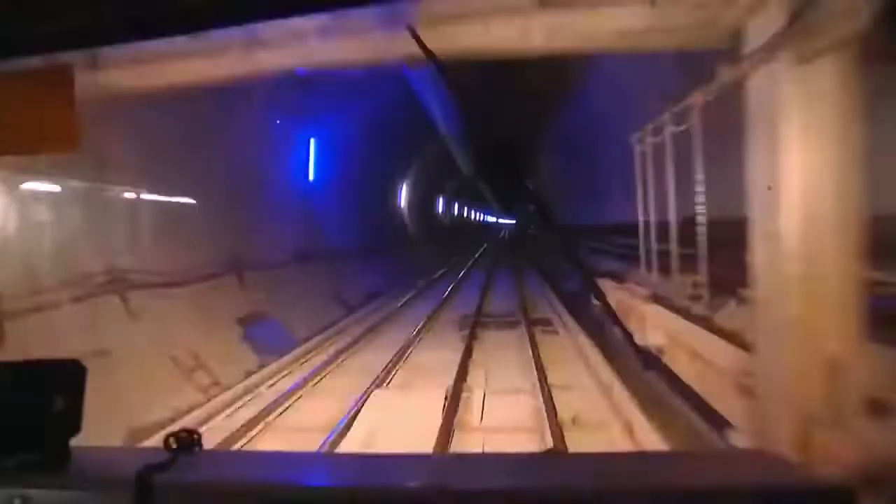Two teams are working through one of the most dangerous geological zones on the planet. If you encounter some bad geology halfway through, it's not like you can go around it. No, you have to go right through it. On the one hand, tunneling with one of the biggest machines ever built. A 30-foot tall drill bit that is mining right through the earth. And on the other, blasting through 7,000 tons of rock each day.

All right, so the charge is in. We're gonna blow the crap out of this wall. After 12 years and 34 miles of digging, they're just 4 months away from the final breakthrough, revolutionizing transit through the Alps forever.

I'm in Switzerland, famous for its handcrafted timepieces, milk chocolate, and political neutrality. But more importantly, Switzerland is the geographic epicenter of Western Europe. 2/3 of all freight sent between Northern Europe and Italy is transported through this tiny country, just half the size of the state of Maine.

But despite its convenient location, Switzerland is a geological anomaly. Over 65% of the entire country is covered by the second largest mountain range in the world, the Alps. With soaring peaks over 15,000 feet high, the Alps form a 700-mile-long barrier between northern and southern Europe. And at present, the only way to get from one side of the country to the other is up and over the mountains.

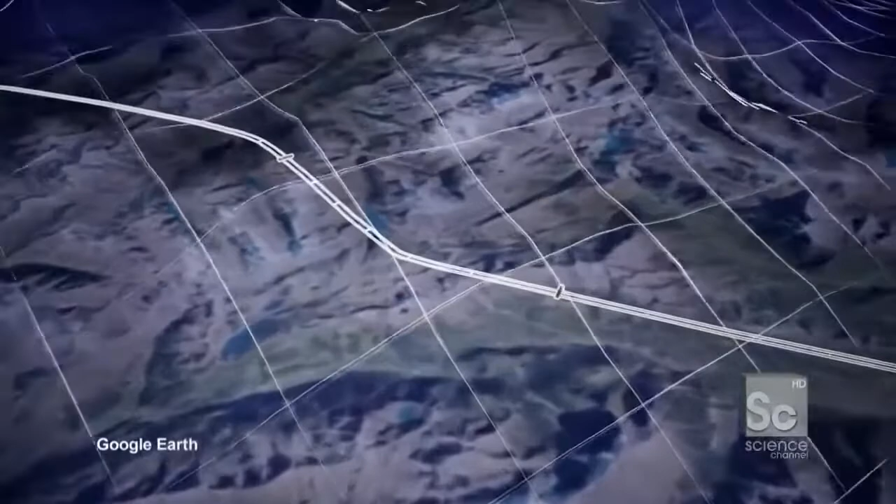Switzerland has launched the most ambitious tunneling project ever attempted, 6,000 feet under the Alps. The Gotthard Base Tunnel will be the longest in the world, stretching 36 miles from one side of the Alps to the other, more than 4 miles longer than the channel connecting England to France. When complete, the tunnel will consist of 2 parallel tubes, each 30 feet in diameter. Soon, high-speed trains will cut straight under the base of the Alps for the first time ever, doubling the current freight capacity and dramatically changing transportation through Europe.

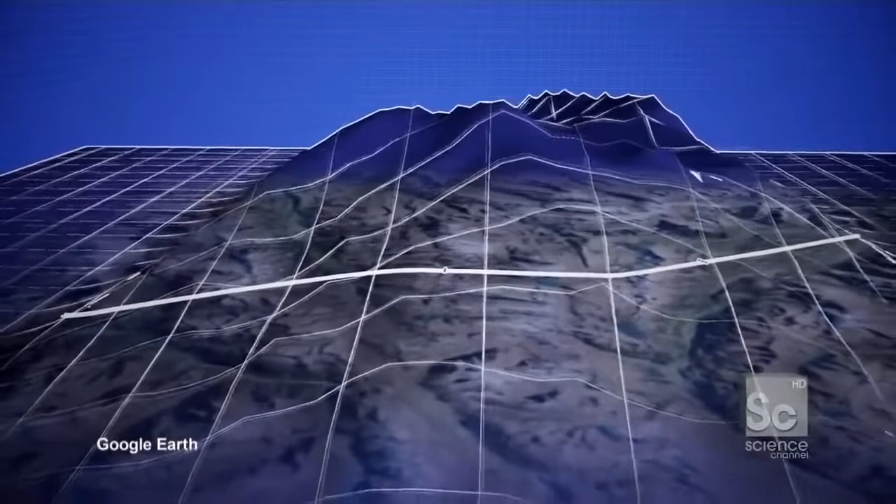I mean, it's more than just making freight move more quickly. Exactly. Alps and mountains are part of the Swiss identity, but it's something that blocks us from the south. And for centuries, people have looked to have a fast way through the Alps. And it's not only about transportation, it's also a cultural exchange. It brings regions together. To build this revolutionary route, 2,000 workers have excavated 24 million tons of material, enough to build the Great Pyramid in Egypt 5 times over.

After 12 years and 34 miles of digging, the tunneling teams have just 2 miles left to go. They'll meet up under the deepest part of the Alps, 6,000 feet below the surface. And today we're headed 17 miles from the southern entrance, where one team has encountered some of the hardest rock on Earth. Now we're about to begin a 45-minute journey in that train, deep into the tunnel, to the very active edge of where the tunnel's happening.

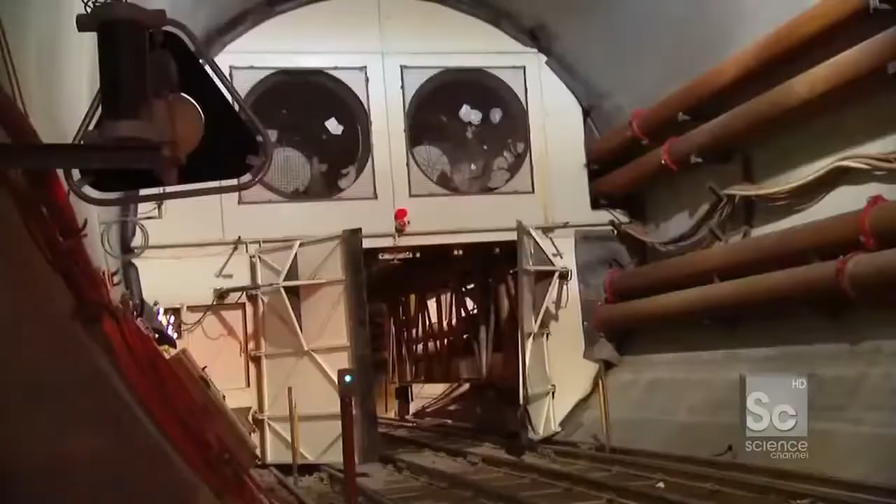Just kind of freaky, really. Okay. And we're off.

Tell me about where we are in the tunnel relative to where we are in the mountains. We're now basically under the main ridge of the Alps. The pressure from the mountain overhead creates one of the toughest rocks in the world, granite. 6 times harder than concrete, it's what's slowing down the tunneling team. So the length of the tunnel, the height of the Alpine mountains, the rate at which you have to build that, all of that has come together to create a situation that's unprecedented for tunneling.

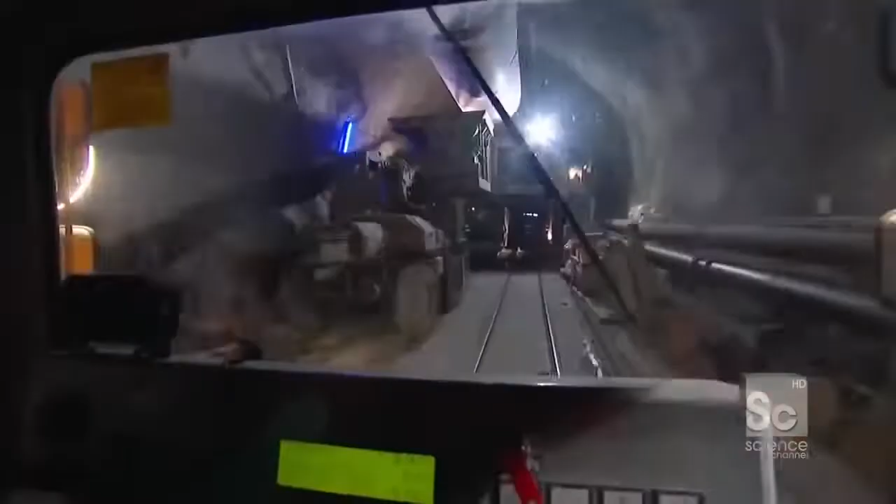Yes, the challenges that we had here on this project will actually probably never happen again. No one's been at these depths in the Alps before. No, I mean, we never know where we're going. We're like astronauts. We're putting our foot every day on a rock where no one has ever been before. Well, after about a 45-minute train ride, it's time to go to work. All right, we're here.

So although it's a little bit hard to tell, although it looks like I'm on some big metal rig, this is the TBM. This is the tunnel boring machine. This thing is 1,200 feet long from the back to the front. And essentially, this is what it's all about. A 30-foot tall drill bit that is mining right through the earth. One of the biggest machines on the planet.

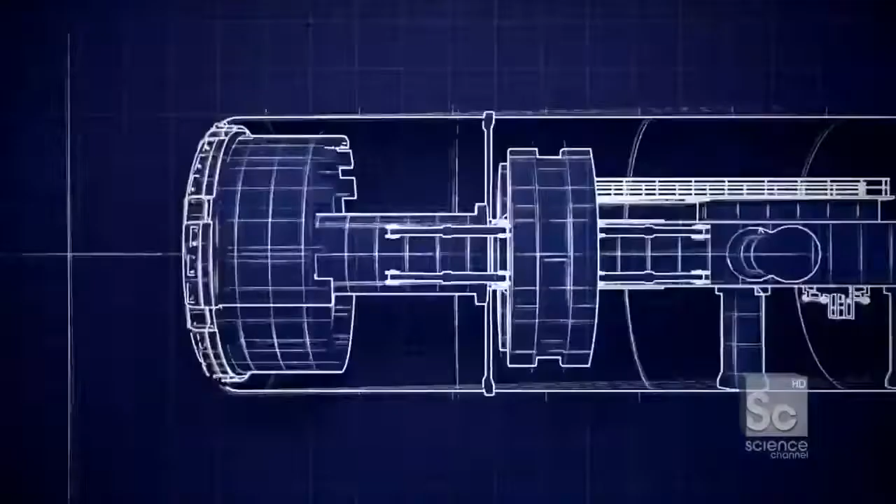The TBM is a 3,000-ton drill as long as 4 football fields. It bores through the mountain with a 30-foot tall rotating cutter head that pushes against the tunnel face, crushing the rock, advancing the tunnel an average of 90 feet a day.

All right, so now I'm actually inside the chamber, directly behind the cutter head, and if you look right over here, those are the cutters. Those are the actual rotating devices that are making contact, physical contact, with the front of the tunnel.

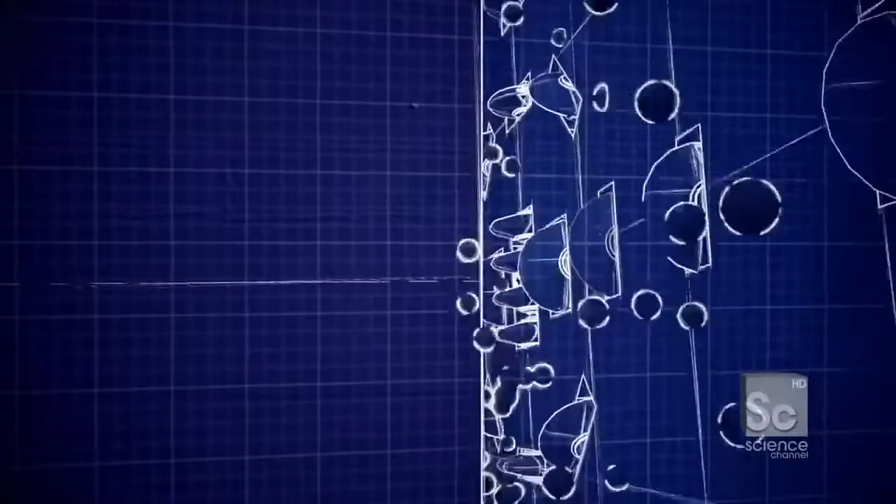The 66 disc cutters located at the front of this TBM shear off more than 7,000 tons of rock each day. They've been boring through the granite for 18 hours straight, and they've become worn down. Now, if the sharp edges are worn more than an inch without being changed, it can slow the TBM from a maximum of 120 feet a day to just 9. The crew has to repair this battered cutter head before they can continue drilling.

The question is, have they been worn out? Do they need to be replaced? And the man who can figure that out is Martin. Martin, give me some screen. Martin is from Germany, does not speak a lot of English, but we're gonna make this happen because we're both now 6,000 feet under the Alps. There's not really a lot of time to try and have a cultural exchange. So, this is our machine here.

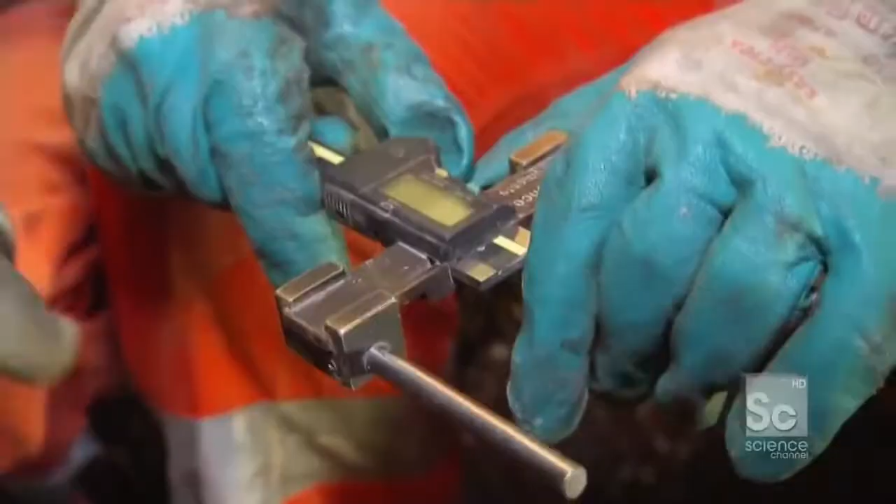Martin uses a specially designed caliper to measure how much of the cutter has been eaten away. If the reading is more than 25 millimeters, then the cutter's been worn down too much and has to be replaced. Myself and Martin are gonna climb into the cutter head, right, 30 feet tall, measure all 66 cutters, and find out what has to go, what can stay to get this machine back to mining.

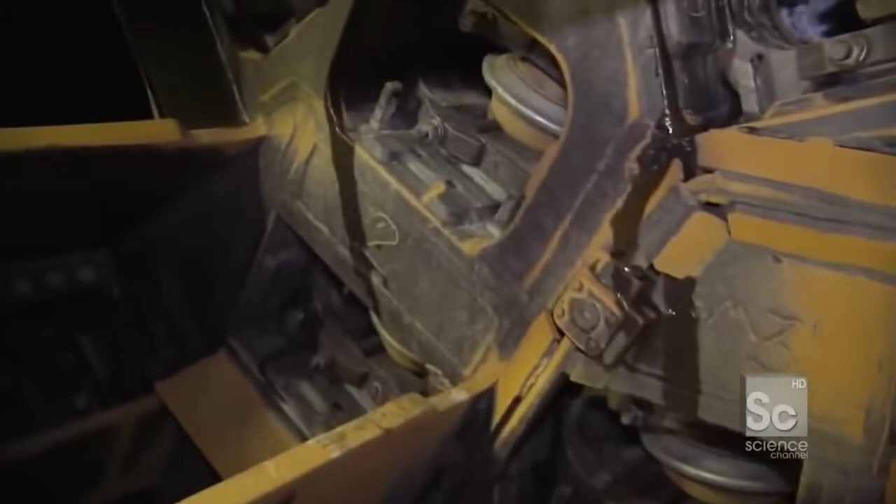Not much below me. Good. All right. The cutter head is as tall as a 3-story building, pushing through the granite with 26 tons of force. Look at him down there. The cutters wear down after less than 12 hours of drilling, 10 times faster than in softer rock.

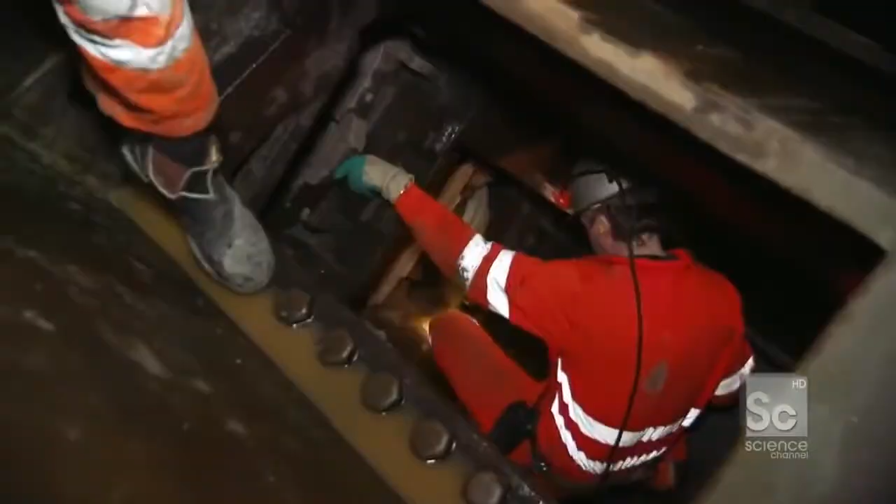We're now in the bottom of the cutter head. I'm actually at the very underside of this 30-foot disc. And what we're here to check out is right there. There's the cutter right there, Martin. So let's measure this cutter head. All right, so now look, as the caliper extends, this is the whole point here.

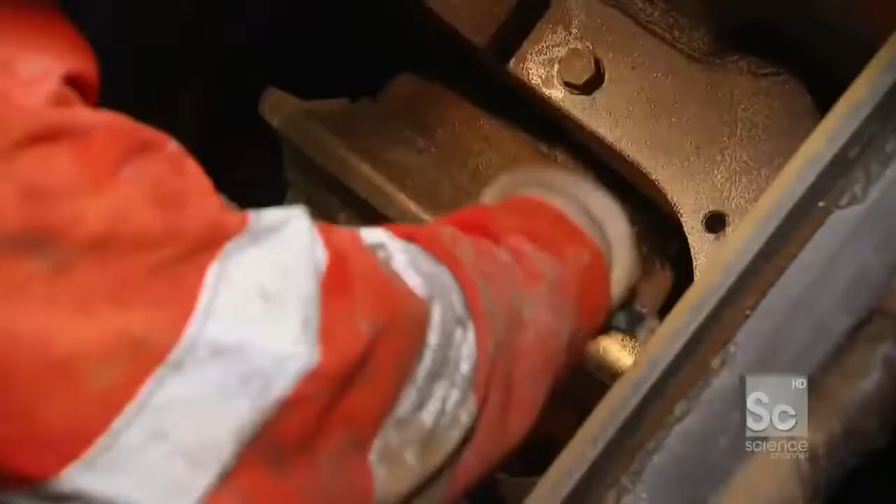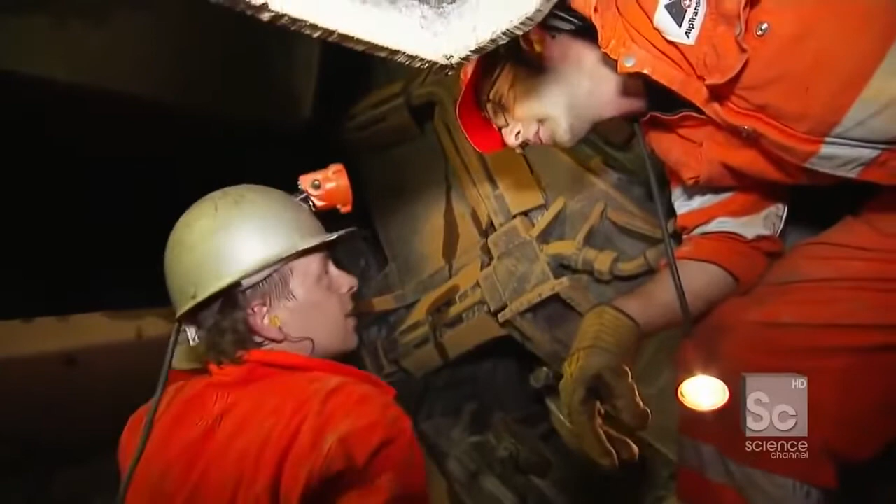Very good. I guess really when you're dealing with 66 different cutter heads, it's hard to get excited after each and every one. After measuring, we found that 3 of the cutters need to be replaced before the TBM can get back to work.

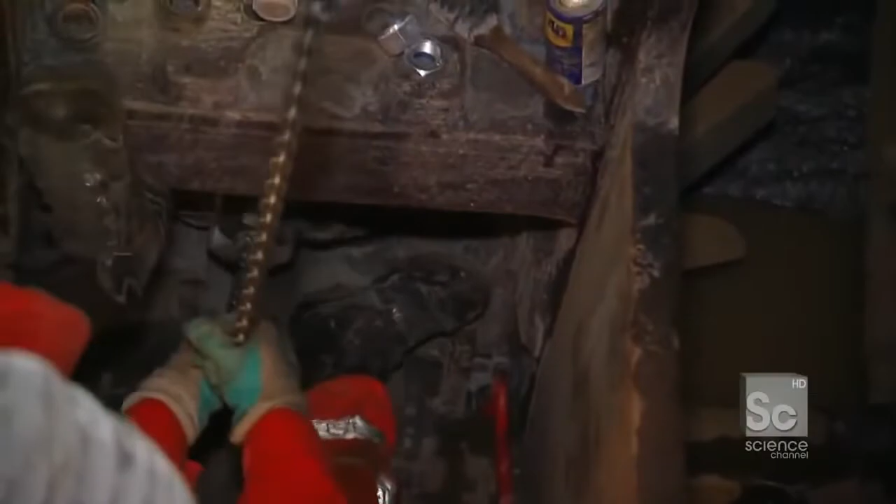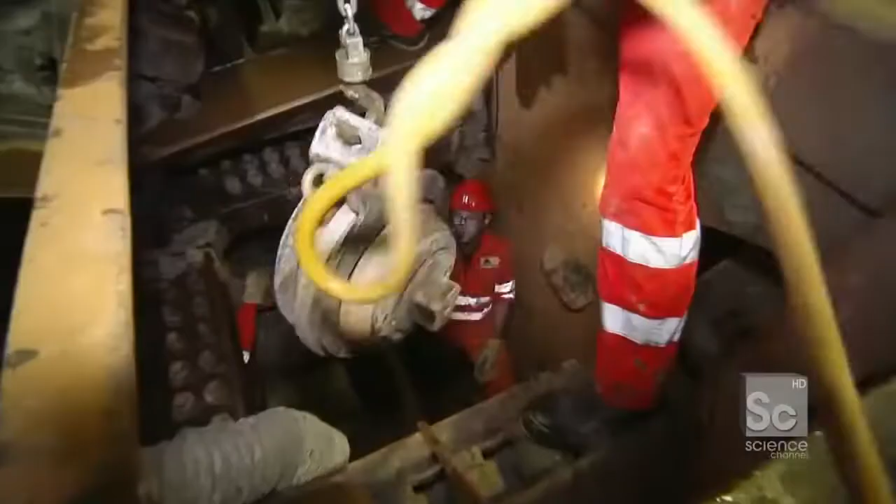So essentially what Martin's doing right now is taking out the old cutter head. Auf. Here it is. He's got it. There goes the old cutter. Over the course of the project, Martin has replaced more than 10,000 cutters. Each one is made of 300 pounds of solid steel, so the crew uses a hydraulic crane to maneuver them into position.

All right, and so this right here is the cutter. You'll notice the steel is at its full length, so this is the new stuff. Gotta get the old stuff. It's basically like changing a tire, a very heavy tire. You know what I mean?

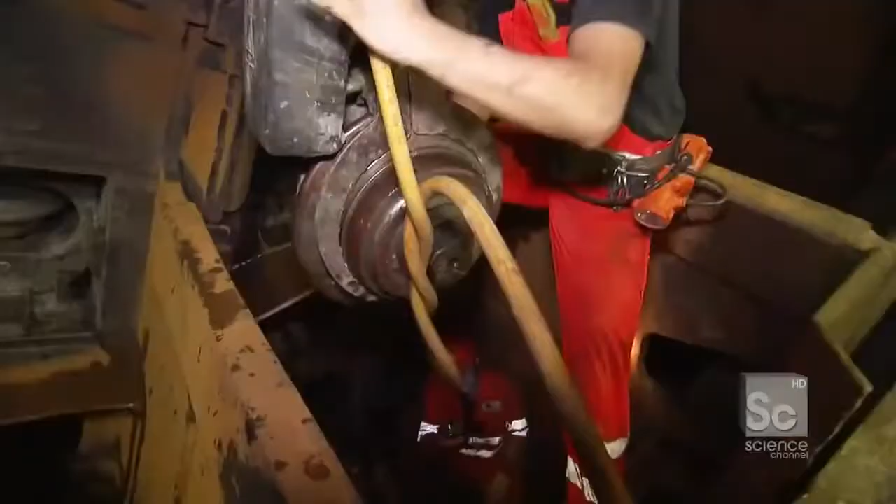So we've swapped the old one out. Next step is bringing the new one. And now it's about getting it to fit in the hole, which seems to involve Martin's feet. There it is. Nice. So he's generally gotten into place. He's now using a pry bar to wedge it over.

The cutter is specifically designed with just 2 bolts. Oh. For fast installation, even in awkward locations.

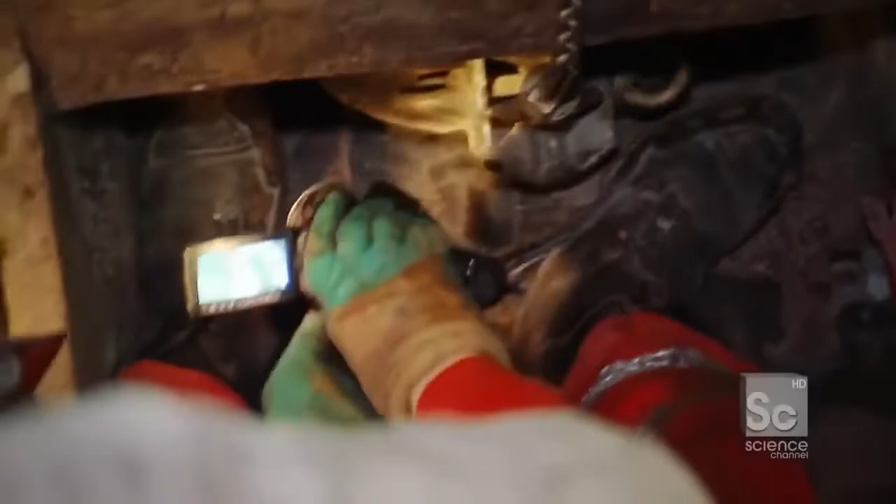Now Martin's shooting. Martin is now fully actually making the show by himself. Nice. Martin's now photographing his own work. Pretty good stuff. Martin, as far as I'm concerned, you shoot it, and then I'll do all the work.

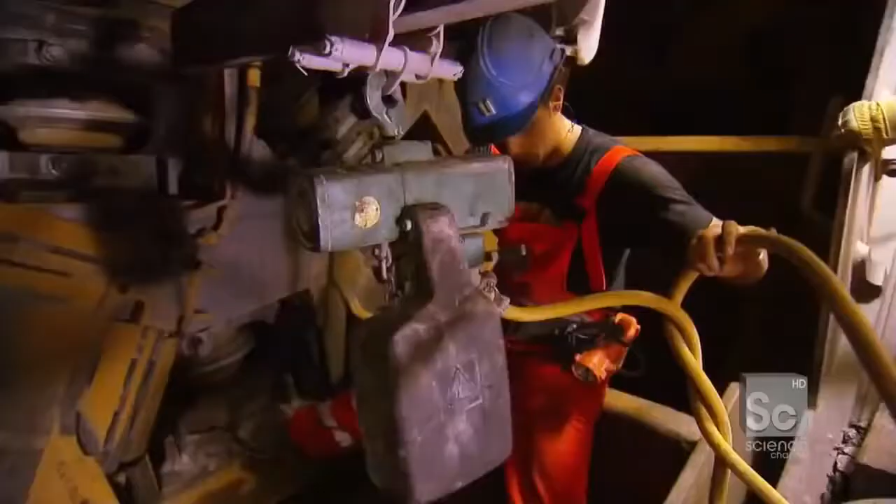It's incredible that there's 66 of these things, and you can imagine they're getting worn down constantly. And this is what it takes to just change out one cutter in one unfortunately inconvenient location. All right, so the old one was taken out. Yeah? New one is in.

Finished? Let's finish. You did good. You did good. You're a fast man.

Come on. And now, thanks to his nimble hands and sort of perspicacity, this cutter head is ready to get back to work and start building this tunnel again.

Coming up, using 1,000 pounds of explosives. This is like full-on, should I cut the red wire or the white wire situation? To blast through one of the toughest mountains on Earth.

The Swiss are known for being incredibly precise. Whether it's their handcrafted timepieces or their famous train system, which, by the way, I can personally tell you, departs and arrives exactly when they say it will. And they're going to need that level of accuracy because the tunnel they're building is not just the longest in the world, but it also has to accommodate some of the fastest trains ever built.

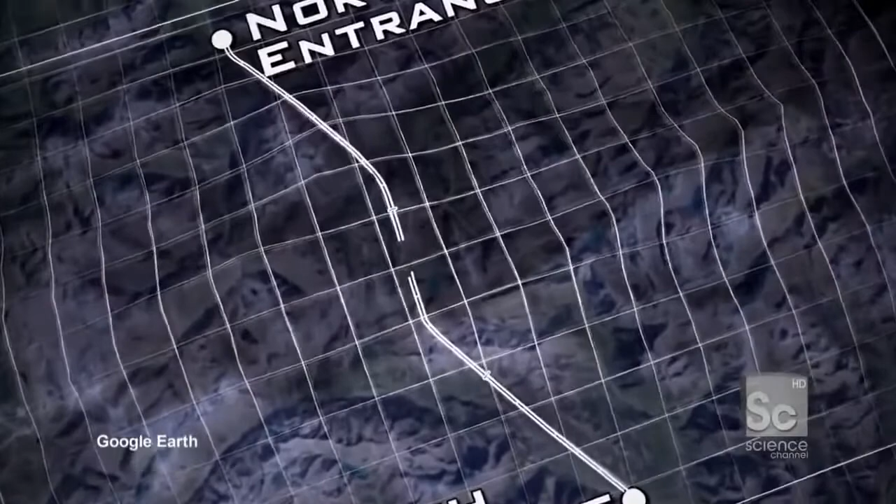Trains will pass through the Gotthard Tunnel at over 150 miles an hour. And at these speeds, even slight curves could cause a derailment. For tunneling teams on either side, this means digging a direct route through 36 miles of rock and meeting at an exact point 6,000 feet under the Alps.

I mean, how accurate do you need to be? We have a tolerance of 12 centimeters, which is this much, that we can use to meet. It's like a bow and an arrow, and you don't see the target, but you still have to be right in the target, right in the middle point. It's incredibly close, and you're shooting an arrow essentially blindly over a trajectory of miles. That's about 1.5 miles still left, yes.

And what I find to be so amazing is that you have a set beginning point, you have a set end point. If you encounter some bad geology halfway through, it's not like you can go around it. No, you have to go right through, and that's the main goal of this tunnel. You cannot change the geology.

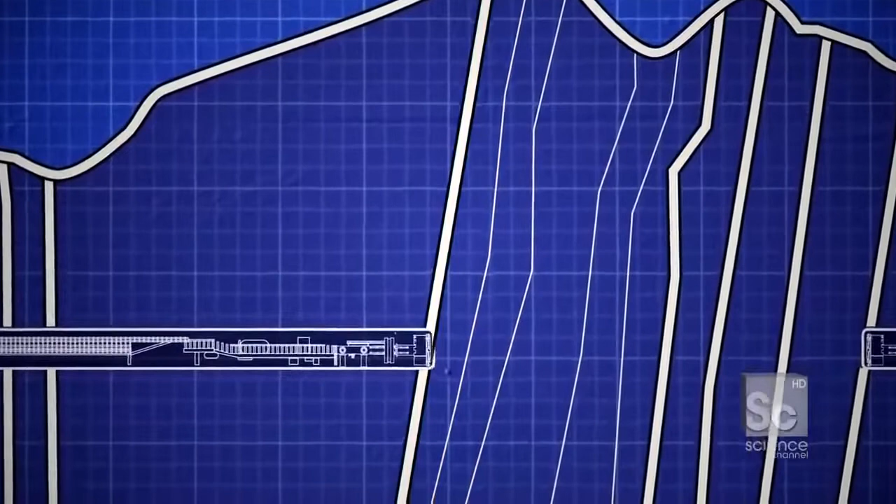Ideally, 2 tunnel boring machines would work towards each other, meeting in the middle. But on the north end of the tunnel, the drilling team has hit a patch of soft rock with fault lines. If they bore straight through, it could crush the TBM. So they had to resort to an older method of tunneling.

So of the 36-mile-long tunnel, 90% of it is drilled by using a TBM, a tunnel boring machine, that can bore through as much as 75 feet each and every day. But for the area where I'm standing in right now, this 1/10 section, there are so many fault lines, it's too dangerous to use a TBM. So instead, they're kicking it old school and drilling and blasting.

Blasting away the rock is 10 times slower than using the TBM, but it's the only solution that'll work in this volatile area. The mountain's enormous pressure creates a squeezing effect, shrinking the tunnel's diameter by almost 3 feet, making it too small for future trains. Now to prevent this, they're blasting a 3-foot wider diameter tunnel, allowing the rock to naturally squeeze down to the right size, matching the other side.

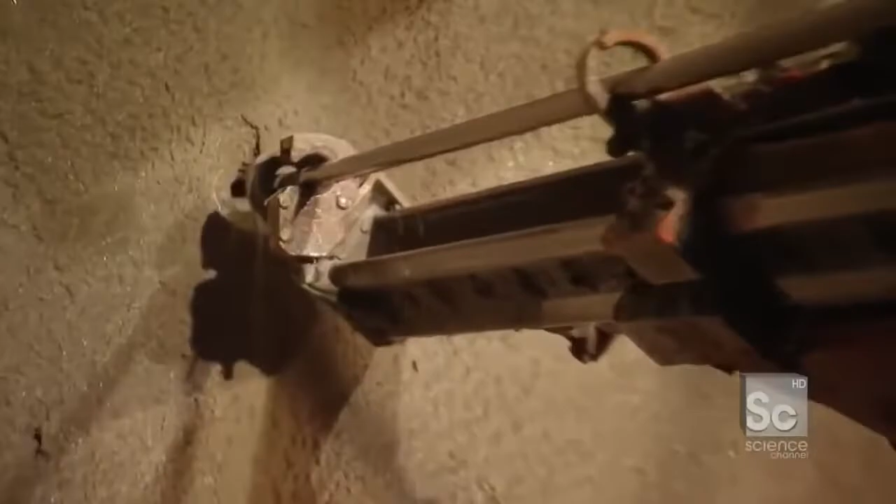So this thing is called a 3-boom Tamrock. Essentially, 3 different drill bits that can put as many as 120 holes into that wall. These holes are filled with ammonium nitrate, a liquid explosive that blasts away the rock, advancing the tunnel 9 feet at a time. Coming up.

Okay, so now I'm inside the cab of the 3-boom Tamrock, and it's this thing and this man right here that are actually driving this thing and supporting this rock face.

How are you doing? You're smoking. That's good. Because we're in a confined space in a tunnel with very little air. So you do? You're both smoking.

Good. It's fun. What this man is doing when he's not smoking is actually drilling into the side of the tunnel. Hang on 1 second, you just want to take a quick smoking break. Get that out. Lights lit up and squared away. Once we have that done, we can focus back on the drilling to make sure that it doesn't collapse. Assuming everyone has a cigarette.

So actually, if you look here at the computer screen, it sort of sums up what we're up to. This is a cross-section of the tunnel right in front of us, and the goal is to locate 120 holes on this face and drill those holes, filling each one with explosives so we can push that wall out and grow the tunnel.

Are you smoking back there? This guy loves to smoke.

To precisely control the diameter of the tunnel, a surveyor pinpoints the location of each hole within an inch, evenly distributing them across the rock face. All right, so at this point, we're almost done. Almost all of the 120 holes have been drilled, and the next step is to load them, or in other words, fill them with liquid explosives.

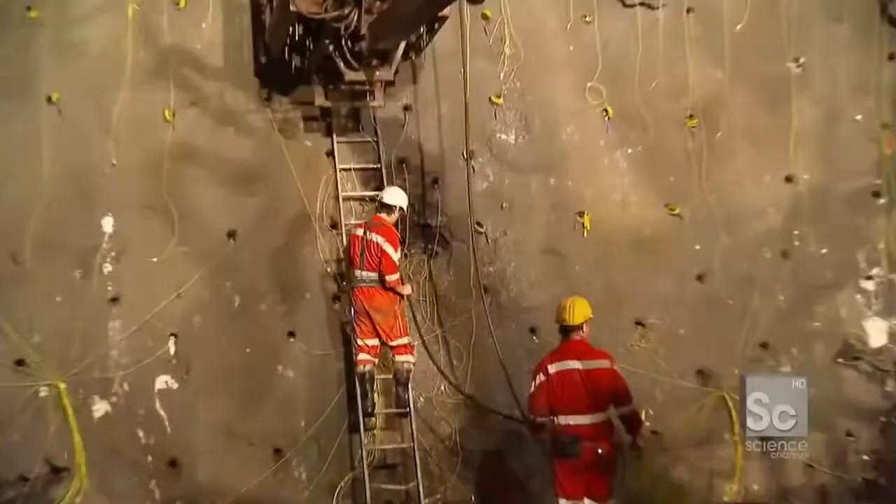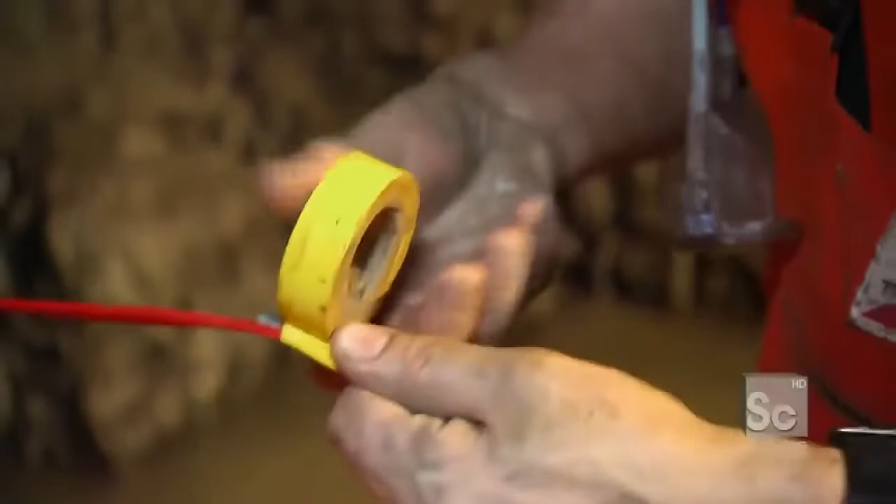The charges are tied together and timed within milliseconds for maximum control, starting at the center and radiating out. The last charges to explode are at the bottom of the face, loosening up the pile of debris, making it easier to remove. The last thing to do is to take, if you look right here, the fuse that's connected to every single one of the holes, connect that to this right here, all the explosives getting tied together with this last piece of, well, yellow electrical tape. You would have thought it a little bit more sophisticated at this point, but that's it.

With the fuse connected, the explosives are live. The team retreats 900 feet up the tunnel to clear the blast radius. When the multi-million-dollar equipment starts to get backed out of the way, you know it's time to go, so we're there. All the holes are filled, charges are connected, we are done, everyone's evacuating. We're ready to blow this thing up.

All right, so we're gonna hide behind this steel container right here. Now, there should be enough protection, but I wanna make this clear. The blast is happening right over there in a straight line. Okay, that's it down there, that's the end of the wall. So we're not down a corner, we're not hiding far away.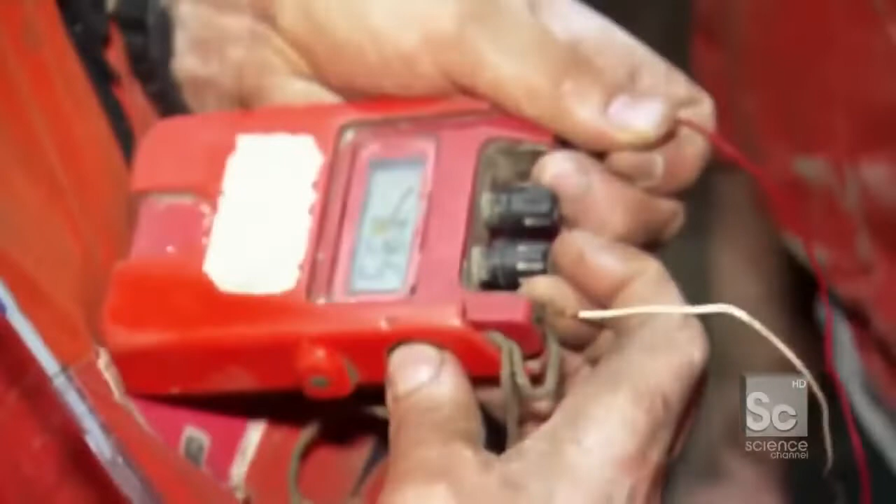There are just over 100 blasts to go before the tunnel is done. And the honor of setting them off goes to the construction company's largest shareholders. And as we speak, in his hand are the 2 wires that came all the way from that wall, physically dragged all the way there, right? He's got the wires there. He's tying them into the detonator, one to the next. This is like full on, should I cut the red wire or the white wire situation. There's about 14 different people from the company to my left here.

Wow. Grande. Well, there they go. Apparently what's required to set off the blast here is that you have to have a substantial amount of stock in the company. I have none, so I didn't get to blow it up. He did a fantastic job. The blast went off, all is well. Potentially the rock wall has been pushed back 9 feet, and I'm gonna start buying stock in this company, so in a couple of years, if I stay focused, I too can blow something up.

The blast puts off superheated ammonia gas. So we have to wait 30 minutes for it to clear before we can check the damage. There's still a lot of residue in the air, so your eyes do burn. Even with the gas mask, it's really hard to breathe. You can feel the ammonia in the air. Well, what do you think? Tip top, tip top. Good? The man is happy.

It'll take the remainder of the day to shuttle all 6,000 tons of debris 5 miles out of the tunnel. Well, look at this. Where I'm standing right here, 15 minutes ago, was a solid wall of tunnel. And now, I'm standing on the residue. The tunnel has been pushed back by 9 additional feet. And they're gonna spend the rest of the day pulling out the muck and getting ready for the next blast.

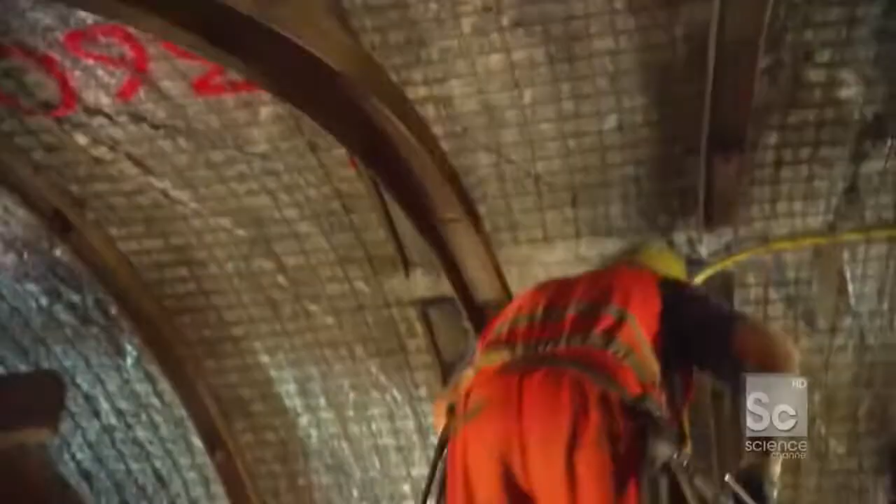Coming up, preventing a catastrophic cave-in with a one-of-a-kind technology. Yeah, it can collapse and fall down, and that's a great problem. That's a big problem. Yeah.

So I'm now driving through the Swiss Alps, one of the largest mountain ranges in the world. And it's complicated. I'm climbing over 5,000 vertical feet. And to do that, you have to negotiate these incredible curves, one hairpin turn after the next. For more than 800 years, people have been searching for a faster route through the Alps. But it just wasn't possible until now. Because to build a tunnel straight through these mountains, engineers had to overcome some of the most complex geological conditions in the world.

Generally speaking, land masses are formed by a series of earthen deposits, one on top of the next, for millions of years. This creates a horizontal stratification of layers. Now, as you can imagine, this is great for tunneling. The TBM goes in on one side and has the same consistent rock type all the way through the tunnel.

However, here in Switzerland, things happened a bit differently. When the tectonic plates made contact, they actually folded upwards, creating a series of vertical stratifications, which make an amazing mountain range, but also make a lot of different geological types. So when the TBM goes into the mountain, it hits one type, and then a second type, and a third, and a fourth, and a fifth. Multiple different problems requiring multiple different solutions.

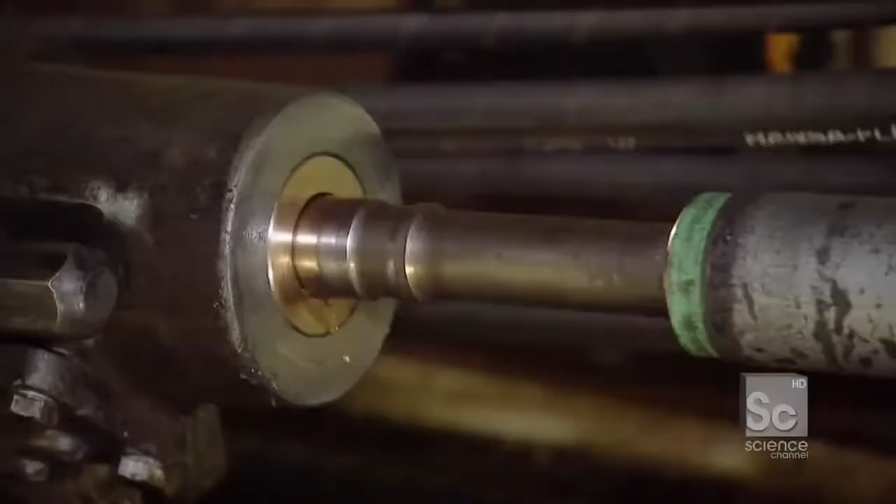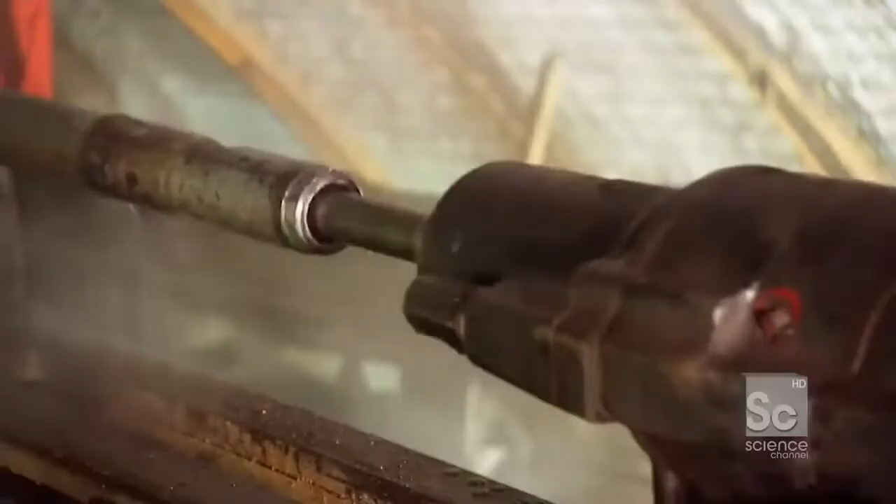The drill literally feels its way through the rock 360 feet in front of the TBM to find out if it's hard or soft. If the rock is too soft, there's a high chance it can cave in while drilling, burying the $30 million TBM and the men working on it thousands of feet below the Alps. So for example, if the drill steel goes right into the rock very quickly, you know it's soft. Exactly. But if the drill steel has to fight its way through, you know it's very hard. Yes.

Yes, we stay also here with our eyes of geologists, not only with digital data, to look at the rocks, how they behave. You have to actually see, feel, understand the rock. Yes. Because in reality, you're still working blind. I mean, you never actually see the rock, you only see the way in which things interact with the rock. Exactly. It's easier today to look at the surface of the moon than to know exactly what we have 10 meters inside this rock mass.

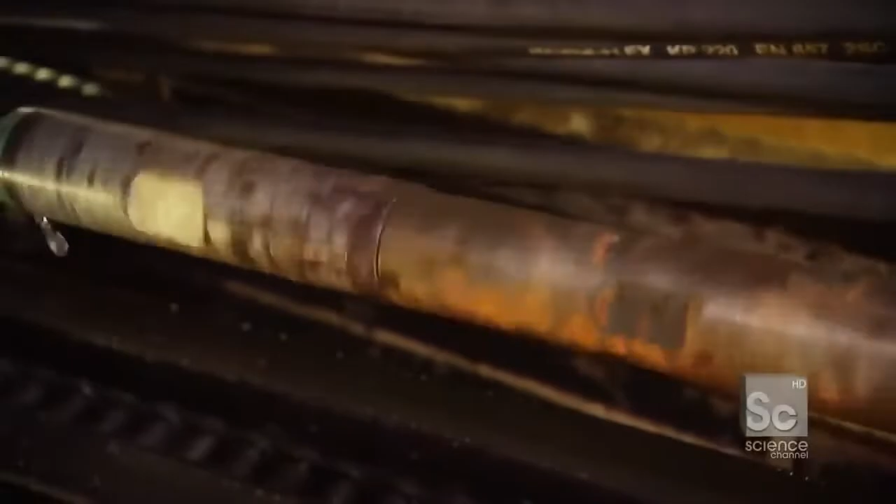To probe 360 feet into solid rock, the drill is made up of 36 10-foot-long sections joined end to end. So as you can see, what we're going to do is latch that on, tighten it up, lock it in. So in doing so, we've added a new piece of steel, creating one long 360-foot probing stick that tells us what's happening out in front of the TBM. So the man who's actually controlling the drill and the force he applies to each subsequent piece of steel is right here. Ralph.

Guten Tag. Good day. I'm Danny. Oh, yeah. Nice to meet you. My English is bad, sorry. My German is terrible. Okay. I started and you... Perfect.

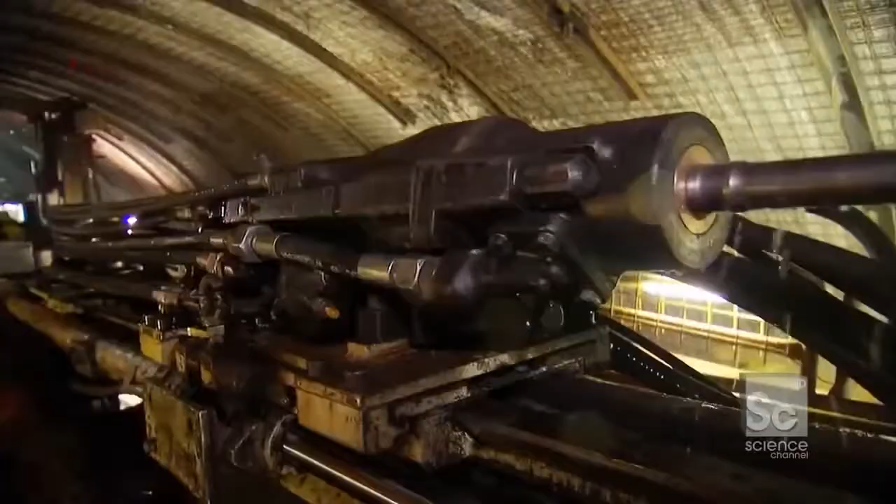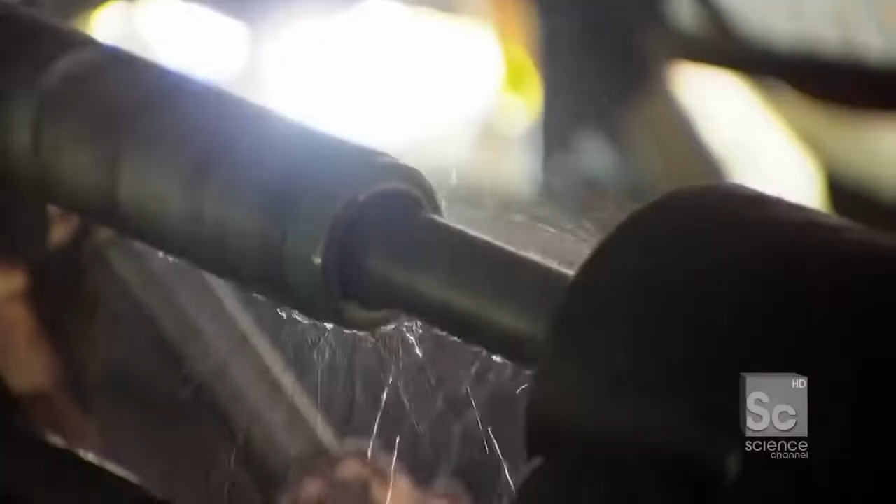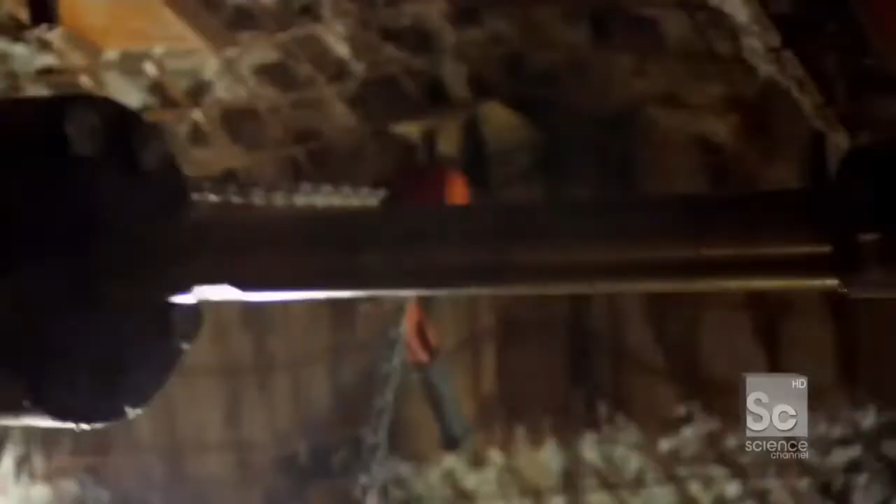About 100 feet in, the drill hit good, hard granite, but it also revealed that the first 100 feet were much softer than expected. If it's too dangerous to drill through, they'll have to stop the TBM and manually blast through the danger zone, adding 5 months and $10 million to the schedule.

So tell me about what was discovered during the exploratory drilling. Yeah, through the drilling, we find out some very, very soft material. So now we're very nervous of the situation. If this were soft rock, what could happen? Yeah, it can collapse and fall down, and that's a great problem. That's a big problem. Yeah.

To find out if the TBM can safely move through this soft rock, geologists are doing a rare secondary exploration using an endoscopic camera to peer into the mountain. And you don't do this very often. No, but in the moment we have a very special situation, so we use this camera thing. It's just the second time or third time ever. And so what do you hope to see by putting the camera in there? We hope to see just a small band of the soft thing, so that would be good, but we don't know.

Same thing, yeah. The camera shows the physical structure of the rock, information the drilling can't provide. So this is it right here. Wow, that's amazing. So essentially, they have an endoscopic camera attached to the end of this blue thing, and they're going to stick this camera in a pre-drilled hole about 150 feet out that will tell them exactly, by eye, what is happening in the rock.

And I've always wanted to do this. That's not the tunnel, that's my mouth.

Geologists look at the pattern and colors of the rock for clues about its structural integrity. If you look at that screen right now, what you're able to see is exactly what geological condition we're gonna experience 150 feet in front of where we are right now. This is like that scene in Star Wars when the monster came out. That's amazing.

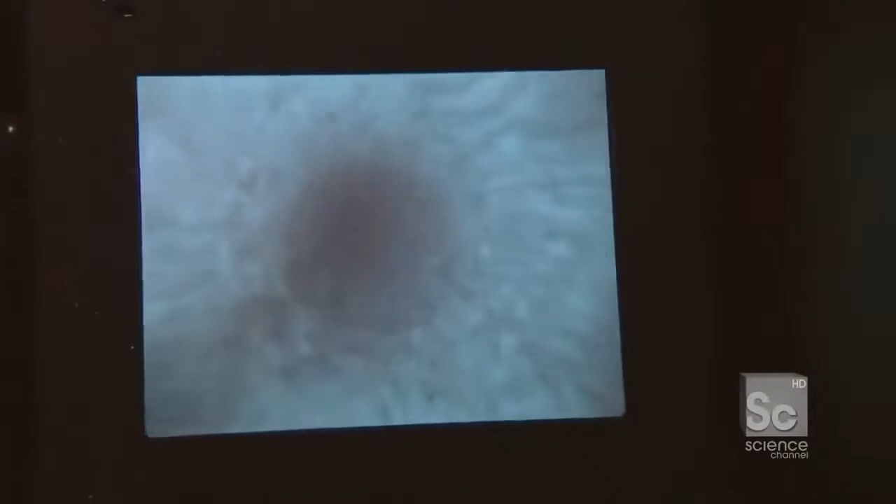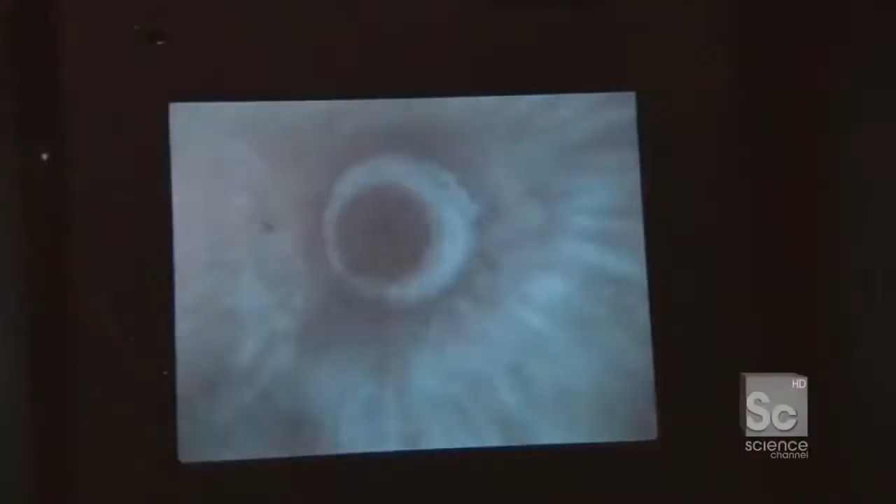So as a geologist, what are you taking away from that image? Yeah, what I see is a stone from inside, and you can see the structure, and you can see that it is the same structure as the stone we have in the back of us. So when you look up, that same kind of black and gray, the same lines you're starting to see just around that edge. Like right there, that white fissure right there. That is nice news. That's good news.

That's good news, yeah. The footage shows that despite its softness, the rock is structurally sound, and the TBM can safely bore through it to get to the hard rock. So if this rock is good, that means that rock out there is also good. Yeah, absolutely. So as a geologist, does that make you smile? Yeah. That's a good rock. That's good rock.

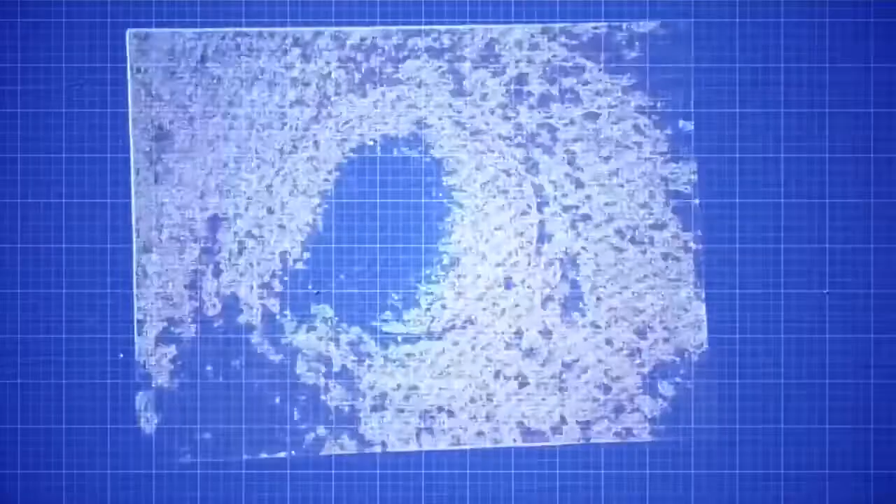Coming up, preventing a major train derailment with a drainage system designed to stop thousands of gallons of water. This can't be the easiest way to do this. But first, who holds the record for the longest tunnel in the world? The answer after the break.

The answer to the trivia question: currently the Seikan Tunnel in Japan is the longest in the world at 33.3 miles.

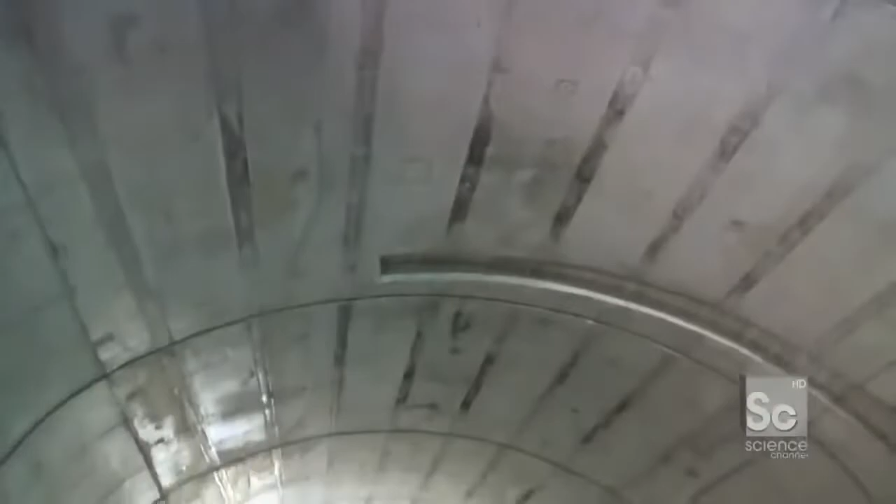The Gotthard Base Tunnel gets its name because it cuts through the base of the Alps more than a mile below the peaks. Now, while this depth creates a fast, flat route, it also puts the tunnel in danger, not only from the enormous pressure from above, but also from the large quantity of water inside the mountain.

The Swiss Alps, if you think about it, are a waterlogged mountain range. There are lakes and streams up top, as well as snow-capped peaks. And when that snow melts, all that water will slowly percolate through the mountain and ultimately come down into the tunnel, rusting the steel and eroding the concrete. Over 1,000 gallons of water seep into the tunnel every second.

If it's not contained, that water could be incredibly dangerous, eating away at the rock supports, potentially collapsing the tunnel, or rusting the high-speed rails, causing a major derailment. So the challenge is to find a way to take this 36-mile-long hole and make it waterproof.

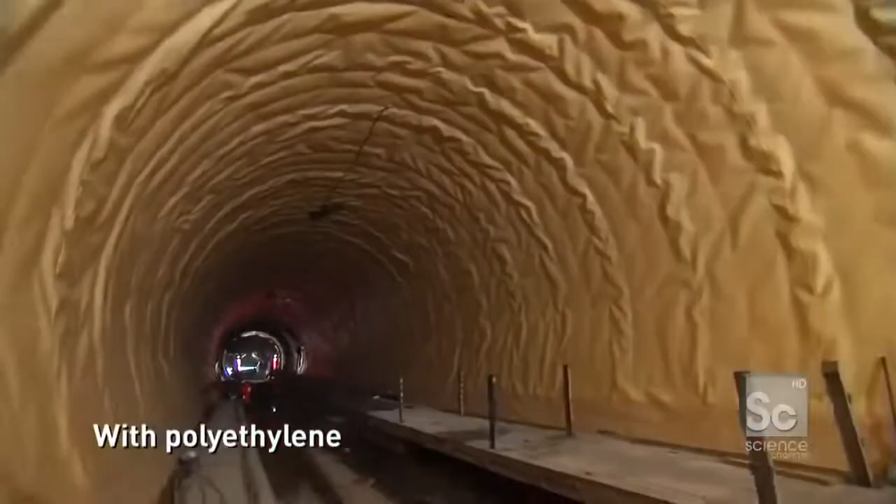Gunther, the challenge is the Alps are full of water. Yes. Lots of water. I know. You know this. I know this. You're from here. You know this. I know this, yes. How do we keep the water from going into the tunnel and rotting out the steel and rusting out the railroad tracks? With polyethylene. This is absolute security. This is what keeps it dry. No chance for water to come out.

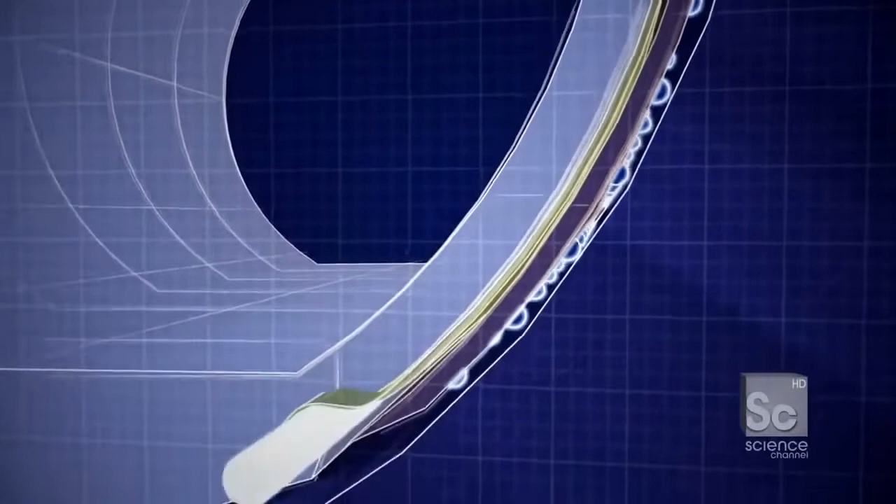No chance. This tunnel has one of the most advanced tunnel drainage systems ever made, hidden behind the tunnel's concrete structural wall. A thin sheet of yellow polyethylene actually creates the watertight seal. Under that, a thicker layer of plastic protects the waterproofing from the tunnel's rough walls. Finally, small spacers create a half-inch gap from the rock face, allowing water to flow down into a drainage pipe. And the key to the entire watertight system, installing it without any punctures or seams.

And so to make sure that it's solid with no seams or holes or edges, we're going to wrap this around the entire circumference. Yes. One piece. This is no problem. All the way around. All the way around. The layers are made from 100-foot-long sheets of seamless plastic. In total, they'll use more than 50,000 sheets to seal the entire tunnel, enough to reach from New York to Boston and back again.

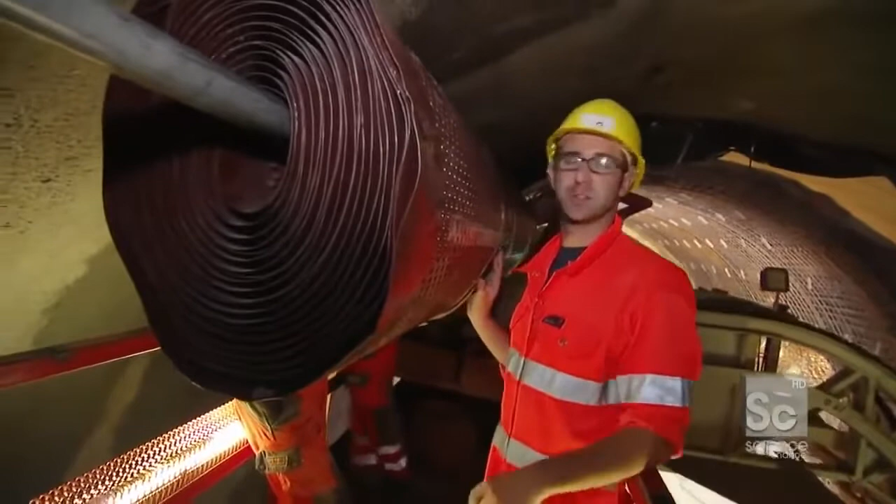Now, one of the oddest things about building a tunnel is that you're working with an upside-down circle, right? And you have to cover every single inch of it. So rather than go up, build some scaffolding, get higher with more scaffolding, they've created this rig that moves 360 degrees around and lets us unfurl these sheets of drainage mat in one single shot. Coming down. Look out. Sorry. The drainage mat is secured to the wall of the tunnel with gray plastic caps.

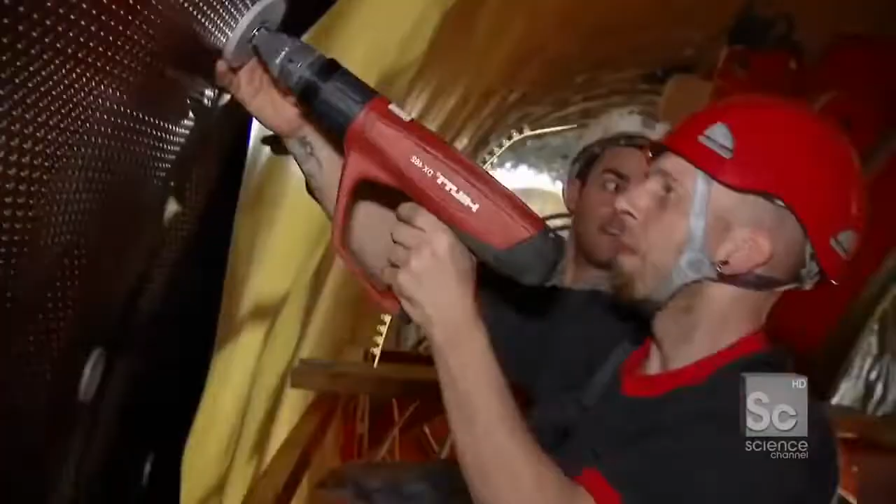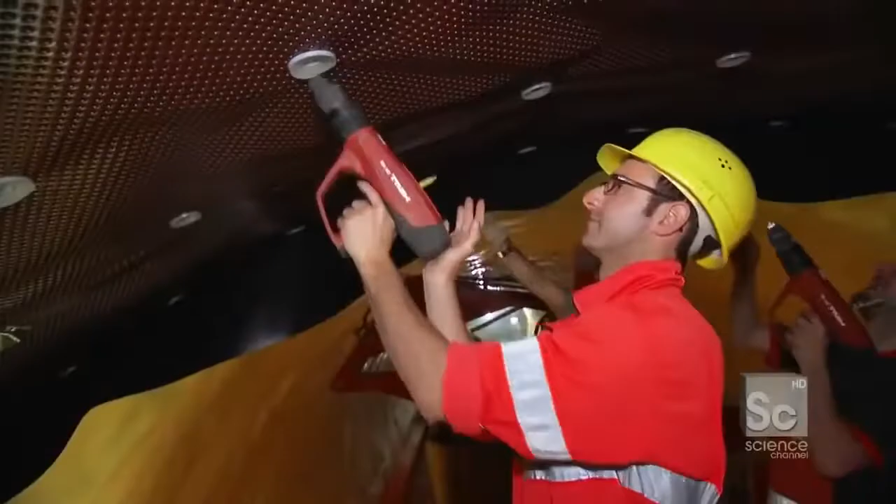There it is. They do more than just attach the drainage mat to the tunnel. These caps are made from the same polyethylene as the yellow waterproofing, and when heated, the plastic bonds together, seamlessly attaching the waterproofing to the tunnel walls. So what Philip's doing right now is taking a heat torch, putting it on the back of the plastic, and melting just a little bit. So there's no tape, there's no nails. He's literally melting the two pieces to form one solid bond. The heat gun, called a hot air welder, melts the plastic at 600 degrees.

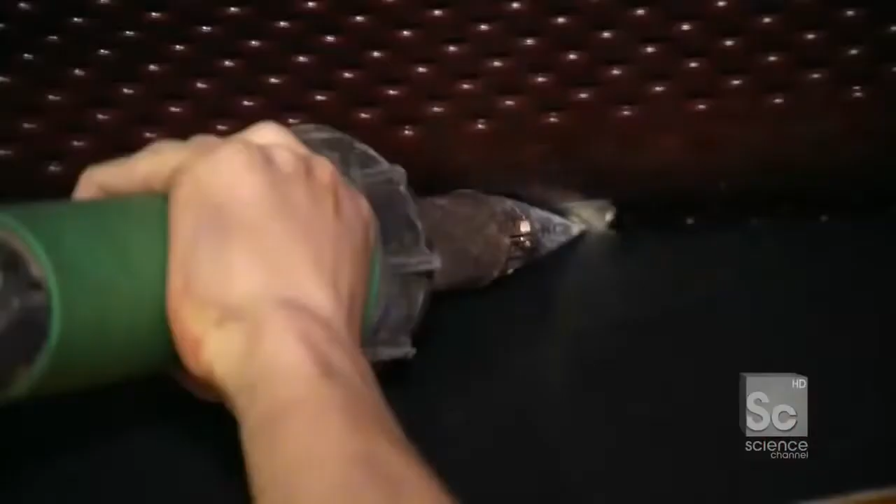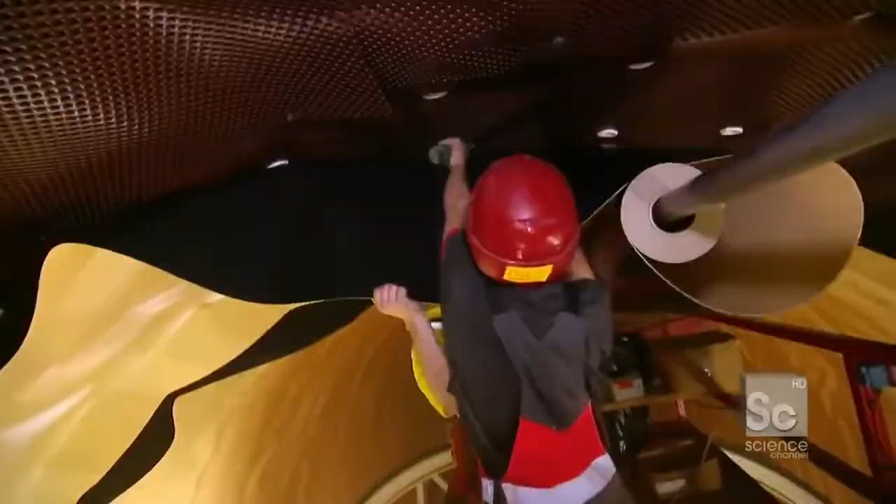We're going up top now, huh? Yeah, give me the heat. So essentially he just put 600 degrees behind me, and now I'm pushing the rubber against it to melt the two, one to the next, and it is burning the crap out of my hand. And we don't stop, we keep moving. We're doing this in one shot. We're moving, we're moving. Ow. Oh no. You gotta be kidding me, why don't you guys wear gloves? This can't be the easiest way to do this. That is the easiest way. Believe me.

Günther, what's going on? You're going nuts out here. We've taken one piece, wrapped around the entire circumference of the tunnel to guarantee that absolutely no water gets in. But to do that, it is absolutely madness. Just pure madness. Günther's team can install up to 10 sheets a day. And with just 2.5 miles done, it's going to take them 2 more years to waterproof the tunnel.

So now that we've done this, essentially, this section of the tunnel, the longest tunnel in the world, has just become watertight. No chance. No chance? I work here, no chance. You did it? Yes, I did. Günther said no water's coming in. If you believe anyone on this site, and there are some very reputable people, I would believe Günther. Günther? Thank you. Thank you, sir.

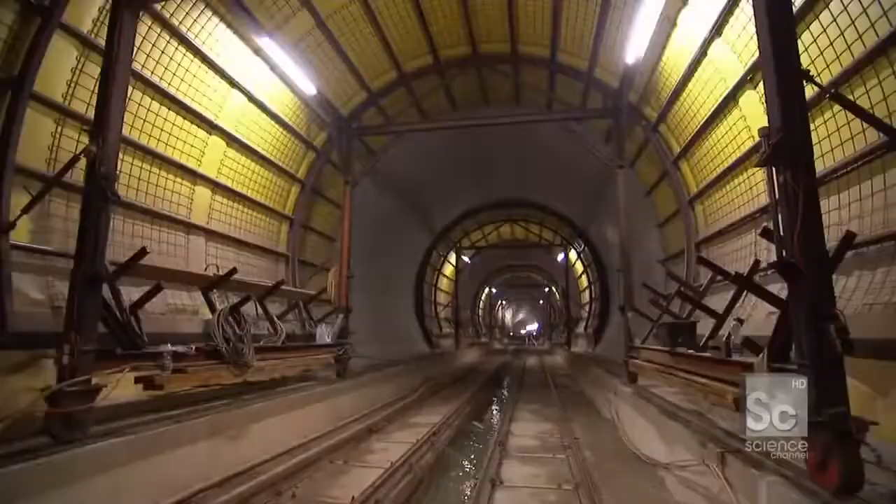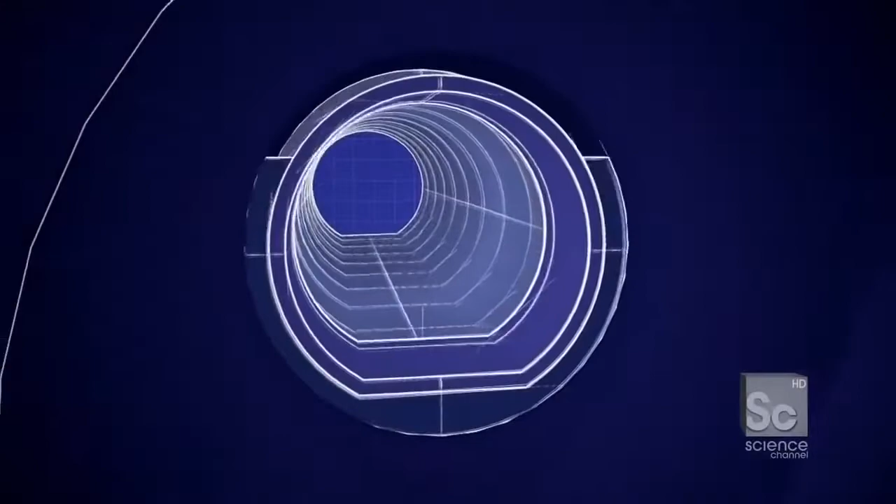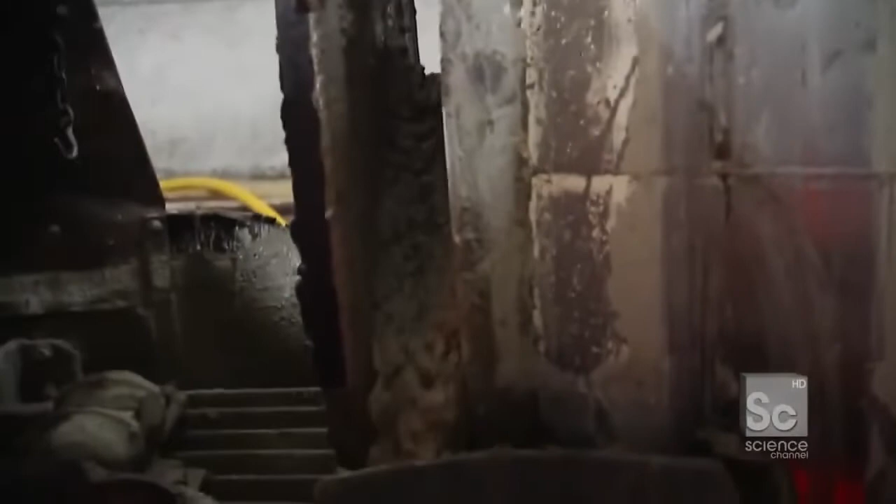The way they do that is using this apparatus right here, something called sliding formwork. Basically a 30-foot-long mold, this formwork shapes the concrete into the final structural wall, almost a foot thick for strength. All right, here it comes, check that. As he turns that wheel, it's opening up. This concrete is coming out, and we're gonna fill the entire circumference of this tunnel, 30 straight feet of it, and that begins right now with this concrete.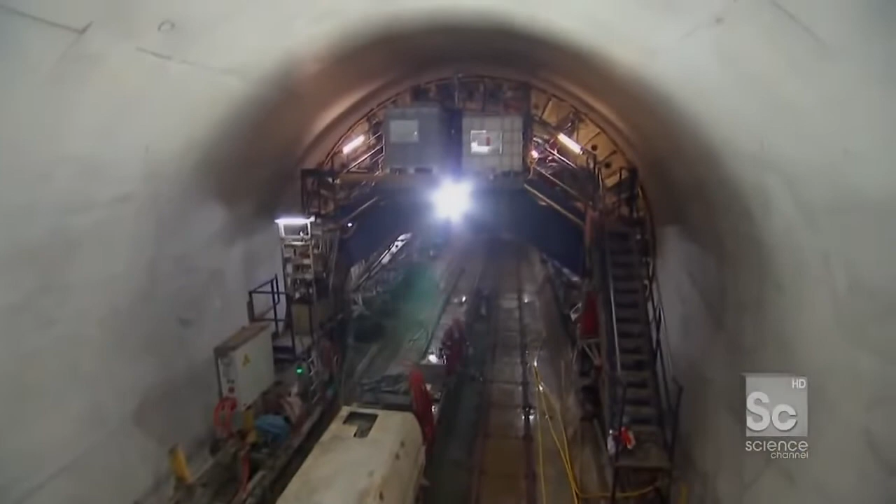Now the concrete is flowing. You hear that each pump, it's pushing the concrete through this tube, up top, and down into the formwork. I'm gonna head up now, where they're pouring the concrete. The concrete team's biggest challenge is maintaining a uniform density around the whole circumference. If the wet concrete is allowed to naturally settle at the bottom of the mold, the tunnel won't distribute the stresses from the mountain evenly, cracking and caving in.

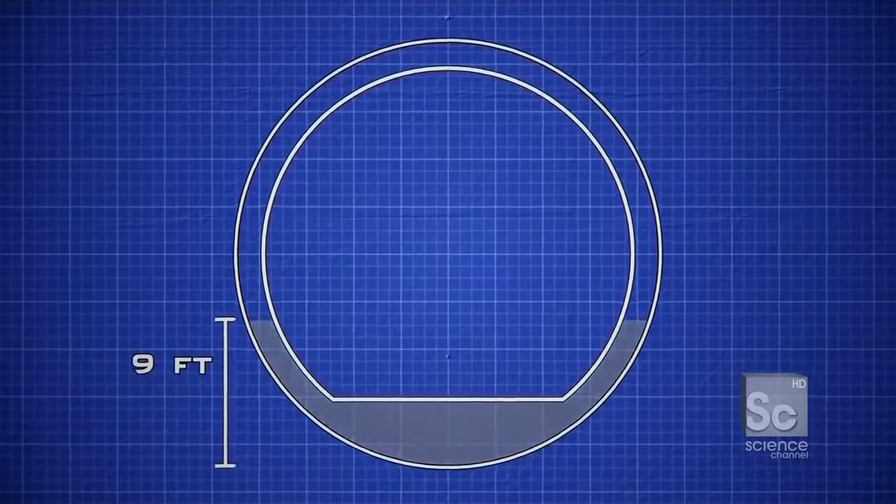To avoid this, the mold is poured 9 feet at a time and allowed to set for 15 minutes before the next pour, making it strong enough to hold up under subsequent layers. But if the concrete pours down, you have no access, except for this. They developed a series of windows, or almost portholes, that open up and allow the guys to get inside and actually vibrate the concrete as it slowly rises around both sides of the cylinder. Can I get in there? Can I look? Yeah?

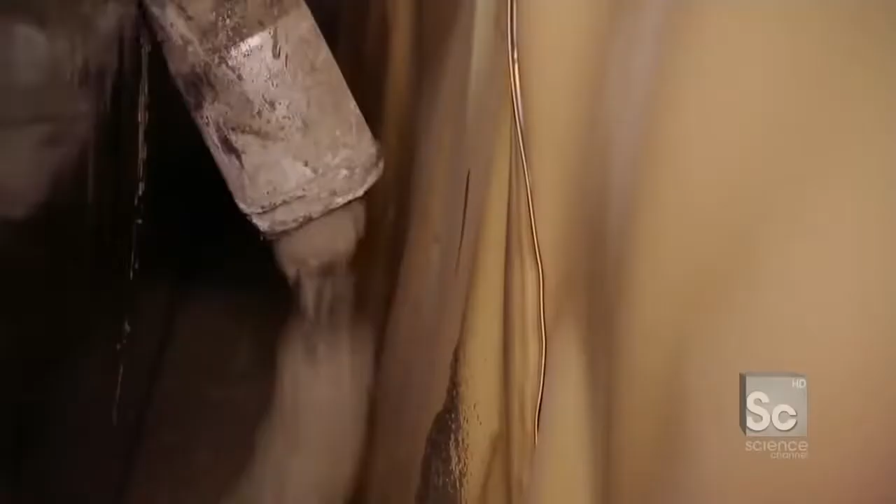Okay. So where I am right now is actually what will become the concrete wall. This is the outer layer, this is the inner layer of the formwork, and as you can see, the concrete is getting poured in and will slowly rise, filling this 1-foot cavity all around the tunnel. This 30-foot section will require over 20,000 gallons of concrete, making a wall strong enough to stand up to the enormous pressure from the mountain above. But keep in mind, that was 30 feet. We have 35 more miles to go to make the longest tunnel ever attempted.

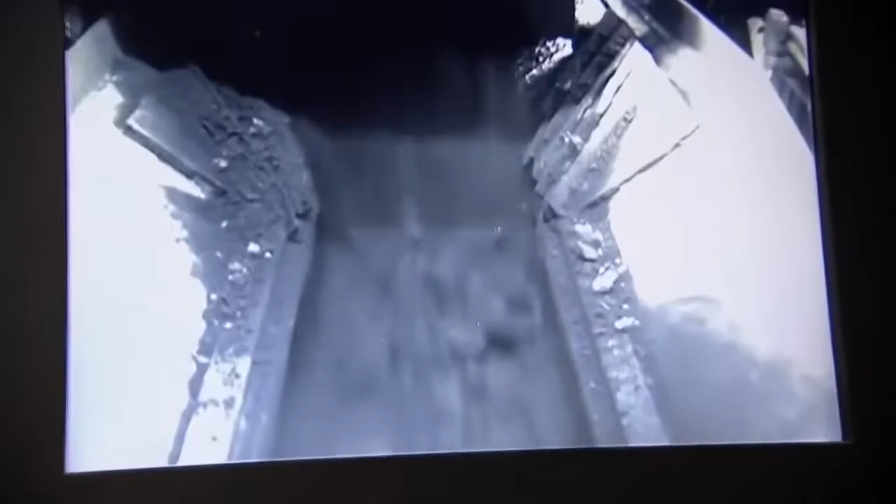Coming up, starting up one of the biggest machines in the world for the final push through the mountain. So if you see this, you're happy. Super. That's super. Super cool.

The Gotthard Mountain Pass is one of Europe's most important trade routes. And since the 13th century, engineers have been struggling to find a faster way through. People always tried to improve, actually, ways through the Alps. First it was just horses with freight on their back, then they built a small street, then actually the boom came with the railroad. Even 100 years ago, the desire would have been, if possible, to bore right through the Alps, have a straight shot. Exactly. It's just that in the 19th century, the people didn't have the technology to build such long tunnels.

The technology finally caught up 12 years ago when Switzerland broke ground with their first tunnel boring machine. Now, they're just 4 months away from completing the first high-speed route through the Alps. But the TBM has got to stay on course with surgical precision to ensure a clean breakthrough. 17 miles inside the tunnel, the team is gearing up for the final 2-mile push through the mountain.

Get to ride in the front of the train with who I think to be possibly the happiest train driver I've ever met. You're Felice. You're driving the train. Felice is ready. He is happy and enthusiastic about the endeavor. I am too. Not as happy as him. I don't think anybody is. But we're ready to go. Come on, let's do this. Let's do this. I love it. Great. All right, we're going in.

After 16 hours of intensive geological exploration of a dangerous section of soft rock, the TBM team is finally ready to begin drilling. Are we here? Yeah. End of the line. In these last 2 miles, the TBM team is facing fault lines and intense pressures from the mountains overhead, making it especially challenging for the driver to both stay on course and avoid a collapse.

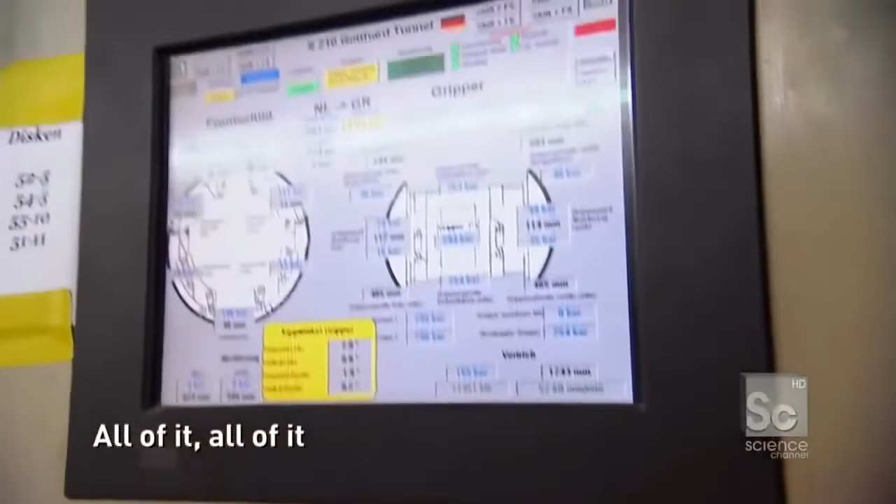Hello, sir. Hello. How are you? Fine. I'm Danny. Yannick. Yannick? Yeah. Yannick, are you driving the TBM? Yeah. All of this madness out here, all this driving? Right here. Yeah. We're advancing right now. So finally, after some very complicated geology, Yannick behind the ostensible wheel of the TBM is smiling because the TBM is mining. We're pushing against the open rock face and rock is coming out of the cutter head and out of the tunnel. So if you see this, you're happy. Yeah, super. Super cool.

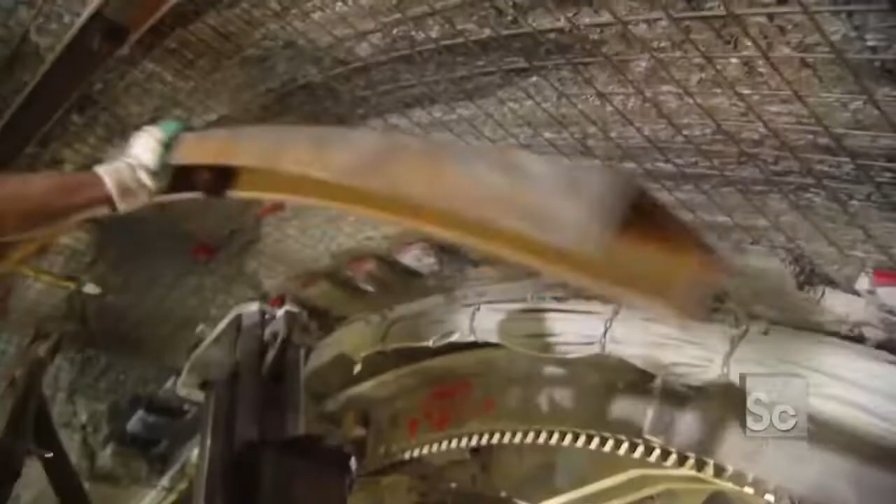As Yannick drives, a team installs metal support beams to keep the tunnel from collapsing. They've got to stay in constant contact to keep the TBM at just the right speed. If the machine moves too quickly, the crew won't be able to put up enough rock supports, leaving the tunnel dangerously weak. This is how fast we're moving. This is for millimeter. So right now, we are moving 53 millimeters per minute. 53 millimeters, so that's 5 centimeters per minute. So that's a very small distance in a minute. This moves very slowly.

As he controls the speed, moving less than 2 inches a minute, Yannick also plots the course to meet the drilling team on the other side of the tunnel. A deviation of just 0.05 of an inch, about the thickness of a CD, could cause a misalignment of more than 2 feet by the time they break through. To realign the tunnel, they'd have to shave off tons of material from the existing walls, changing its shape and compromising its integrity.

So as we speak, we are angling a little bit to the left and a little bit up. During the 9-hour shift, Yannick checks and adjusts the TBM's heading more than 100 times based on real-time GPS readings. He controls the horizontal and vertical path with the TBM's 2 massive grippers. They also propel the TBM forward, advancing it 6 feet with each stroke.

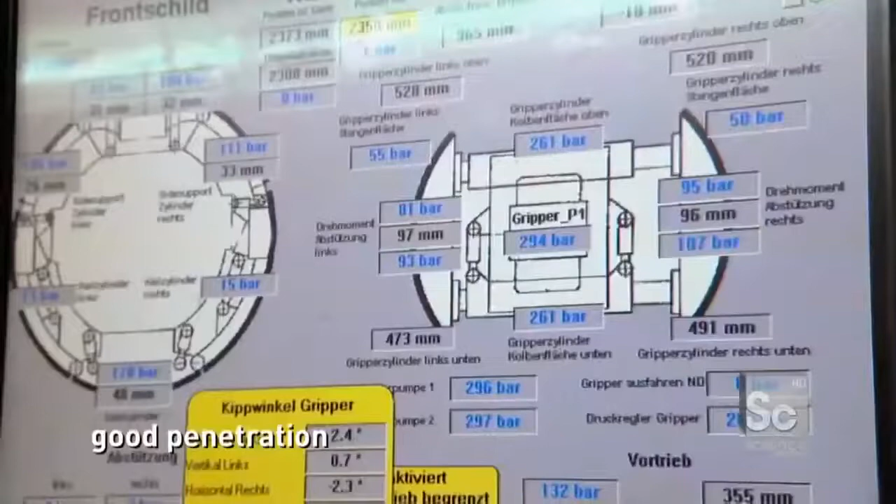This moment is perfect. We have power, good penetration. It's perfect. Yeah, perfect. We have good power, good penetration, good travel speed, beautiful looking rock. What more do you need? Other than maybe not being 6,000 feet under the Alps. But barring that, we are finally in good shape.

After a half-century of planning, Switzerland is just 5 years away from completing the longest tunnel in the world. And if all goes well, high-speed travel through the Alps will be possible for the very first time. Switzerland is famous for the Alps. It is what's defined the image of the nation for hundreds of years. But at the same time, these mountains have also transformed the country into a barrier, disconnecting it from the rest of Europe. So the historical challenge has always been to find a way to connect to other countries while contending with this enormous geological impediment.

And it's been an 80-year dream to not just get over the Alps, but find a way through them. And after 20 years of design and construction, they have just about made this dream a reality. And if you come to Zurich in 2016, you can hop on a train and be in northern Italy in just 2.5 hours. And all the while, travel right through one of Mother Nature's biggest obstacles.